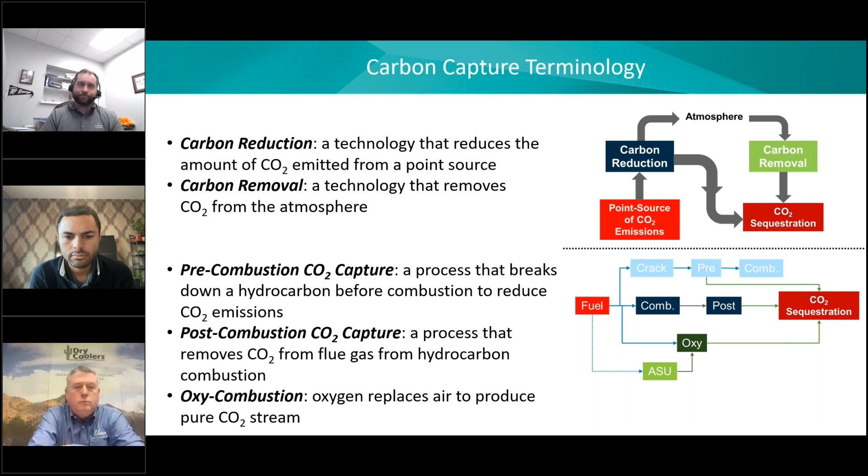So CO2 capture is really about separating the CO2 from the stream you're targeting, and that is the challenge - how do you do that most effectively? There are things that can impact how big of a challenge that is in different cases. If you have a lower concentration CO2 stream, the penalty for separating it, whether that's heat or energy input of some other sort, is going to be higher for the amount of CO2 you get out.

Because of that, you want to maximize efficiency of these processes to minimize the energy penalty, and you want to reduce the equipment size to minimize the capital cost. All of these things add up to whatever it is you're going to pay to do CO2 capture, so you want the least energy and the smallest equipment for the smallest cost. Different applications may dictate different separation technologies.

So the plant characteristics will determine integration. Some technologies use heat as part of the process, some don't. Depending on the availability of heat, that determines whether that process is a good fit.

And then the CO2 end use could impact the requirements as well. Some technologies have an easier time producing a very pure stream of CO2; others struggle to reach that same level of purity. So depending on what you're going to use the CO2 for, whether that's the beverage industry or sequestration, that could impact what technologies you can choose.

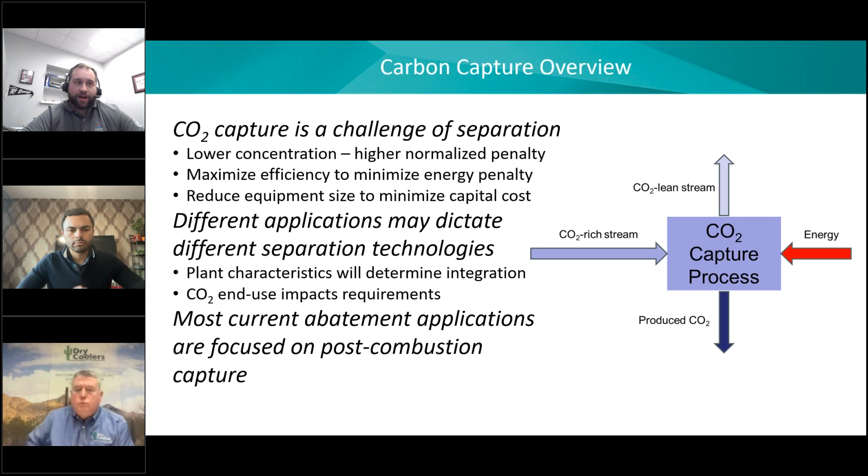As I mentioned, most current abatement applications are focused on post-combustion capture because we already have developed the processes we're using to make different things that help drive our world, and we don't necessarily want to reinvent those processes - we just want to decarbonize them. Right now, post-combustion capture is one of the more straightforward ways to do that.

So now digging into the technologies themselves, first we'll look at absorption, which is carbon capture by solvent. Solvents are liquids that can take CO2 into the bulk phase of the liquid. So if you pass a gas stream through that liquid, the CO2 will bind with the liquid and the rest of the gases can leave at that point.

Here's how that works: flue gas or a process gas enters typically the bottom of a big vertical column, and as the gas goes up, you have the solvent flowing down the column. As those come in contact, CO2 binds to molecules in the liquid, and you have what's called a rich solvent that leaves the bottom of that absorber. It's rich in CO2, and it goes over to a separate process unit called a regenerator or a stripper.

There, the CO2 is stripped out of the liquid by applying heat to it. So the liquid can absorb CO2 at low temperatures, but then it releases it at higher temperatures. After the heat is applied and the CO2 is driven back off, that solvent can then be recirculated back to the absorber in a big figure-8 loop, basically. So you're catching CO2 on one unit, releasing CO2 on the other. The benefits of these technologies are that you can really achieve very high capture rates, 95+% pretty easily.

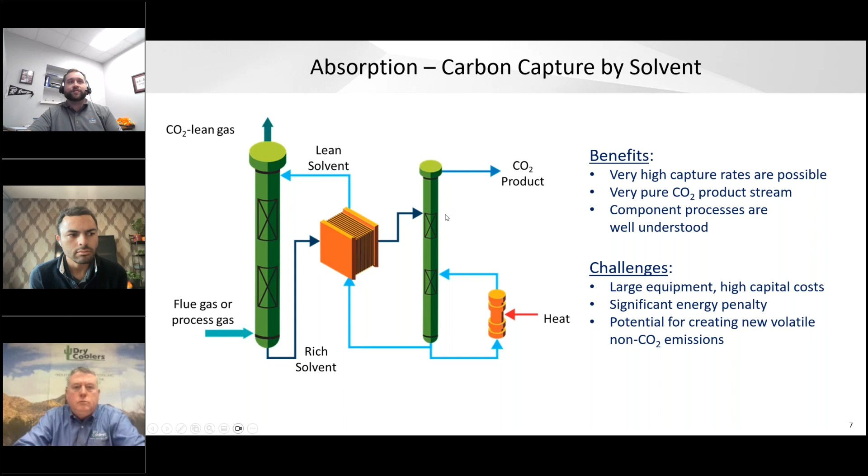For absorbers, the key is to maximize the amount of contact that the liquid and gas can have to really drive high capture. You want to minimize the pressure drop to prevent high O&M costs, and then you've got to control the solvent conditions to avoid those unintended emissions of volatile compounds.

The challenges to scale these up are that the bigger this equipment gets, the harder it is to maintain a uniform liquid distribution within the column, and it gets harder and harder to minimize unintended losses at that point. But that's what research is focused on, making sure we understand the mechanisms and how to avoid those as well.

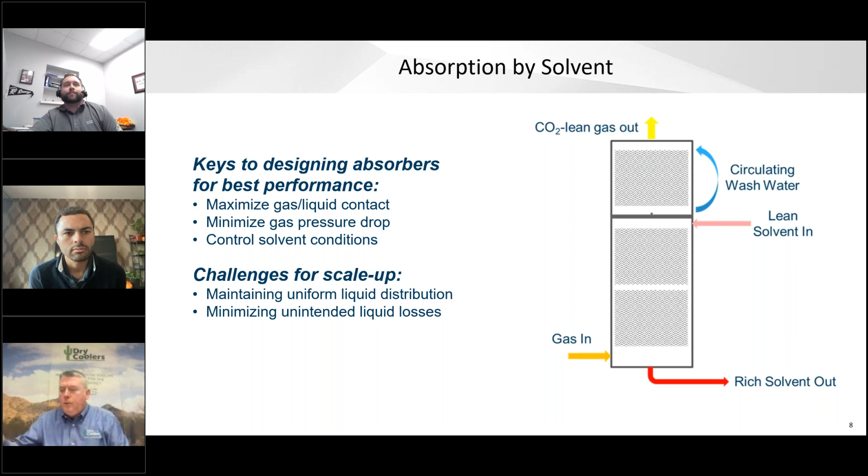On the regeneration side, really a big thing, especially as you look at new industries to apply carbon capture to, is how can you maximize heat integration and minimize heat losses? This is an energy intensive process and a thermal process at that. We want to take advantage of every bit of heat integration that we can within a plant, but eventually there's going to be a CapEx exceeding the OpEx benefits potentially at that point. So understanding the best ways to integrate that heat is important.

You also want to minimize the potential for any undesired chemical reactions. While you have to heat these solvents to drive off CO2, when you heat them up, they can break down as well and form degradation products, which could be hazardous to personnel exposure, or could just be an added cost from having to replace the solvent material. So understanding how to balance capital versus operating cost and maintain the conditions that will maximize efficiency are really important when you're looking at solvent-based absorption systems.

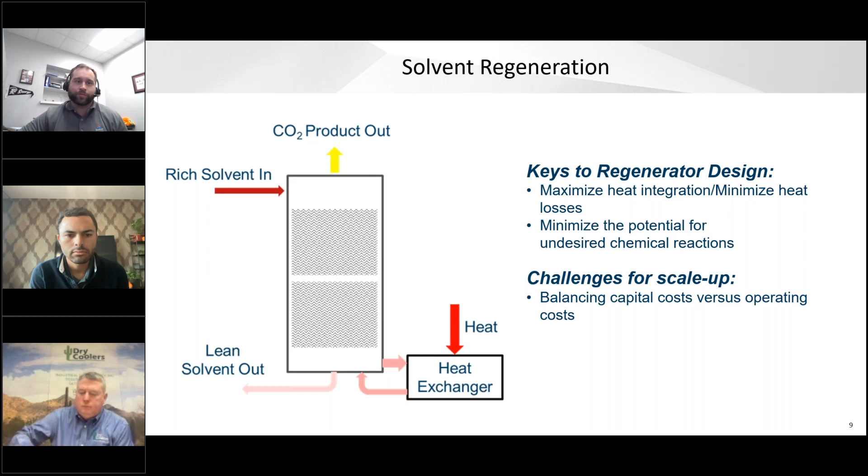Another set of technologies would be adsorption - so adsorption is carbon capture by solid. Instead of using a liquid, you have a solid where CO2 will bind with the surface of that material due to its physical properties or even its chemical properties embedded in that surface. So you flow a gas stream across this adsorbent, and CO2 binds to the material as it goes through the system, and then everything that's not CO2 can leave on the other side.

At some point you have to flip that around, and heat it again to drive the CO2 product out, or you can also swing the pressure or some combination thereof. The benefits of using a solid instead of a liquid is you can eliminate water from the mixture, and decrease the energy penalty of driving that CO2 back off because you're not having to heat water. You can also produce a very pure CO2 product stream with much less potential for volatile emissions because you don't have a liquid that can be evaporated as easily.

Just like solvents, we use sorbents for other purposes in industry already, so we understand the component processes really well. Challenges for this remain that this is large equipment with high capital costs, and you've got to have a material that's durable and reliable. If you have a liquid system and your material starts to break down, you can kind of have a bleed and fill system where you're making up solvent really easily.

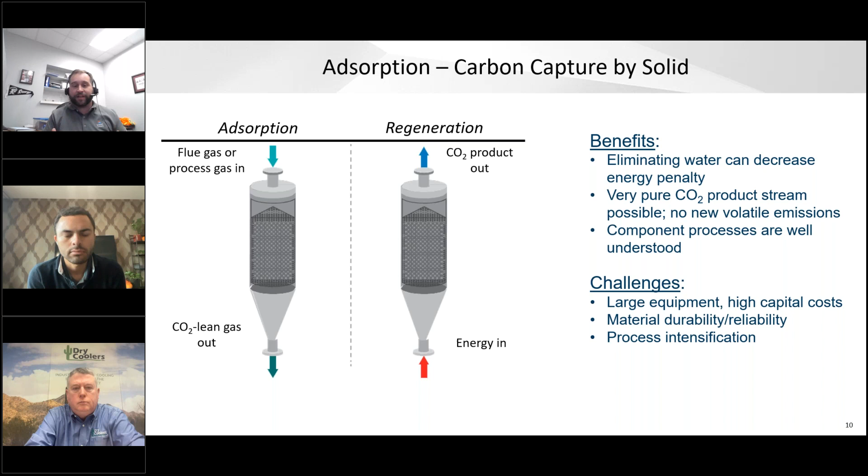If you have a solid that's packed into some vessel, that's going to be pretty labor intensive to go and change out that material. So you want to avoid that both from a capital and a labor cost perspective. And then how do I make this process intensified enough to minimize any downtime when the equipment's not either adsorbing or regenerating CO2? Because if it's just sitting there, it's just a cost that we're carrying.

So optimizing it, you want to maximize the contact area between the solid and the gas stream while minimizing pressure drop, because pressure drop means cost. And then you've got to have effective heat transfer to make sure you actually maintain the capacity of the material over time.

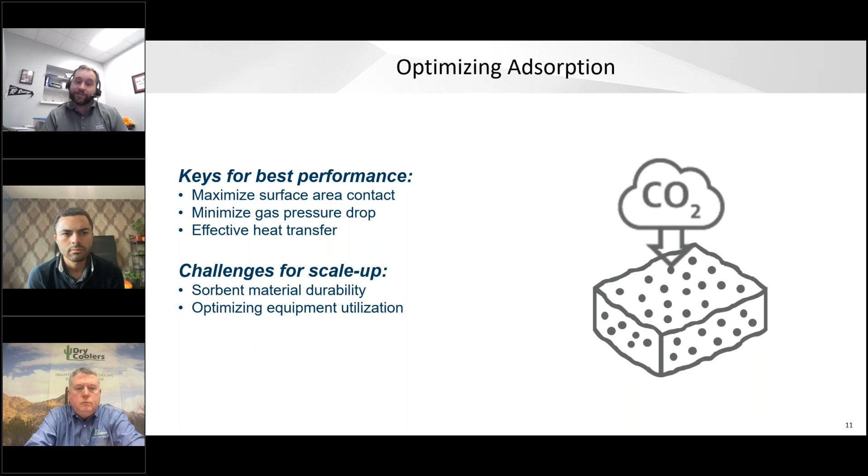Scaling them up is challenging because you've got to make sure the materials are durable. They're going to last long enough to make this process worthwhile. And again, you've got to make sure the equipment is running, not just sitting and carrying costs.

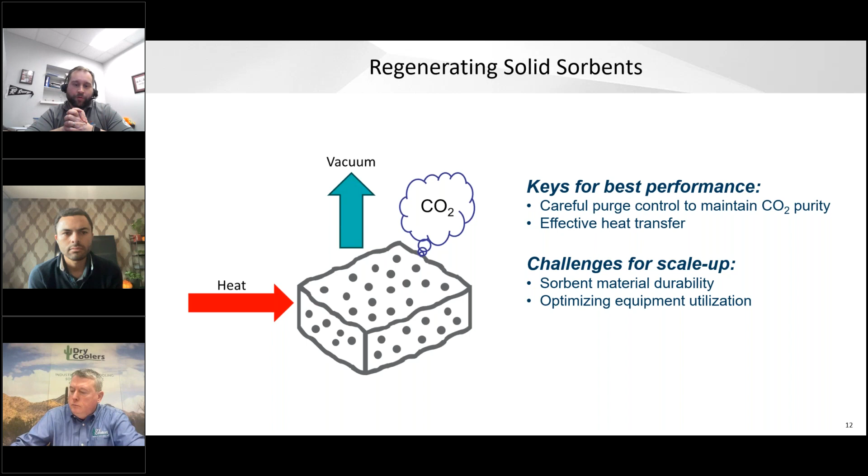On the regeneration side, you've got to have really careful purge control typically on sorbent systems to maintain CO2 purity, because you want to be able to put it in a pipeline or sell it into the market. And you've got to have effective heat transfer so you're not wasting heat as you're regenerating the CO2. We want as much heat as possible going into CO2 production and not into heat losses. The challenges are really the same for both the adsorption and the regeneration side.

A third technology type would be membranes. This is carbon capture across a barrier. You may be familiar with membranes from other separation techniques, typically water purification would be a good example—reverse osmosis is something people think about. But this is going to be a semi-permeable material that will let CO2 cross the material, but will not let other things in a gas stream cross it.

So the gas is typically compressed, and then it goes into the membrane. CO2 crosses the material and comes out as a product, and everything that's not CO2 exits the other end as the emission gas.

Benefits for membranes: this is not something that requires heat. So if you had a facility where heat was challenged, you could use this instead—it's an electrification of carbon capture. It's typically smaller equipment with lower upfront capital costs because you're compressing that gas stream, so the separation can occur in a smaller area. And you don't have a potential for new emissions because you didn't introduce anything new to the stream.

The challenges for membranes are really about material durability and reliability. If that material breaks down and starts letting things through that aren't CO2, then you don't have the product you're looking for. Or if the material plugs up, like any kind of filter can—think about even a simple example like the air filter in your HVAC system at home—you're going to end up having less throughput, and that can also be a problem.

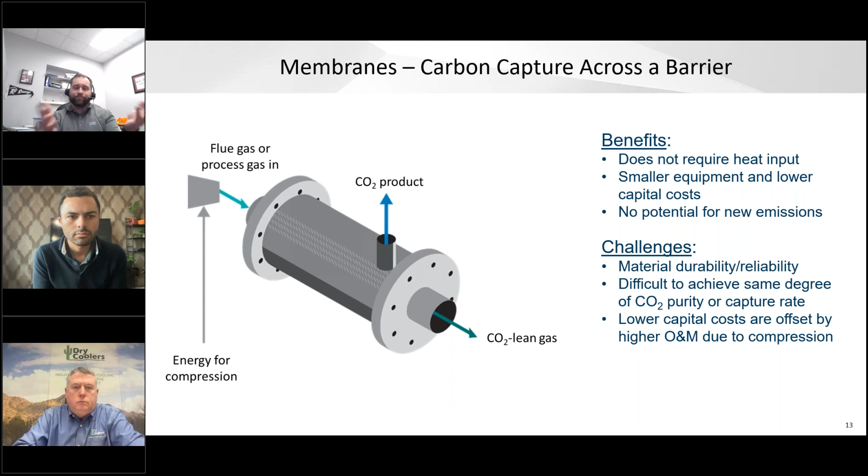It's difficult to achieve the same CO2 purity and capture rate that you can with solvents and sorbents, and I'll explain a little bit why on the next slide. And the lower capital costs are going to be offset by higher O&M due to compression. So it's a little bit of, do you want to pay in capital or do you want to pay in O&M? Either way, you're really going to end up paying the piper.

Membrane materials work by basically a differential concentration across the material. You can look at it in this illustration: the more CO2 there is in a stream, the more of it can cross a membrane barrier. And as you have less and less CO2 in your stream, you're going to have less and less flux across that membrane material. There's a couple of terms that describe this relationship of things crossing a membrane: permeance and selectivity. Permeance describes how much CO2 can cross the barrier, the rate of transfer across the material. Selectivity means how much CO2 versus, say, nitrogen in this case will cross the barrier.

The unfortunate thing is you have an inverse relationship typically between permeance and selectivity. So the more CO2 you can let through at a higher rate, the more of other things you're going to end up letting through as well. Whereas if you want very pure CO2 crossing it, you're going to have a much lower flux across the material. So optimizing those is really important.

We also have to minimize pressure drop. I said that we're having to do compression on these typically, and that's cost, that's energy you have to put in to do compression. There typically are things you can do to a process to make it more membrane amenable. If you can adjust the process to maximize the inlet CO2 concentration, that will create better performance in the membrane material.

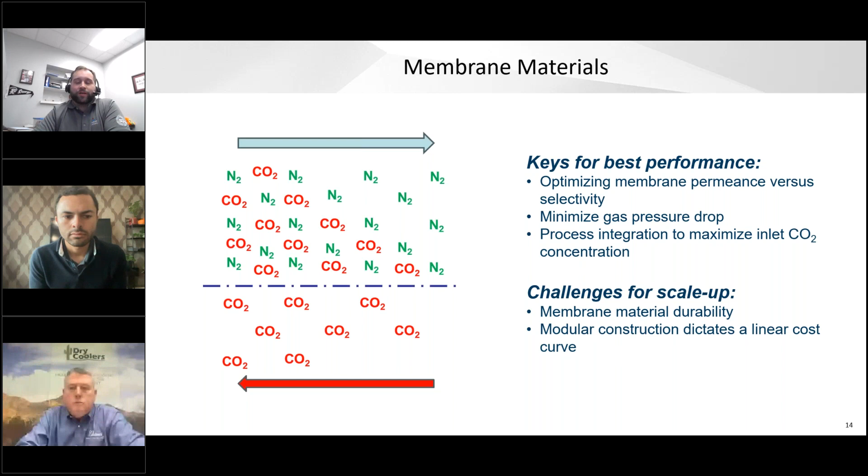The final technology type I'll talk about are cryogenics. This is carbon capture by phase change. CO2 is interesting in that it can change directly from a gas to a solid, and that's typically what cryogenic technologies are doing. They are pressurizing and cooling a gas stream to the point where CO2 becomes a solid, like dry ice. That's what solid CO2 is. You put it through its paces of cooling, compression, and then some type of separation, and you can produce a CO2 product and a lean gas based on just the thermodynamic differences between the technologies.

The benefits of this: because you're compressing the gas stream, the equipment's typically going to be smaller and less expensive. Because you're not adding anything to the stream, you don't have a potential for new emissions. And you can have a very pure CO2 product that can be collected as a liquid. You can create the solid and then melt that into the liquid phase for transport, which has some benefits.

The challenge is this may be difficult at large scales and large flow rates of CO2 because, frankly, you can only build compressors and heat exchangers so big, so there's going to be kind of a limit there. And your lower capital costs are, again, offset by higher O&M because not only are you doing compression, you're really doing some type of refrigeration at that point as well.

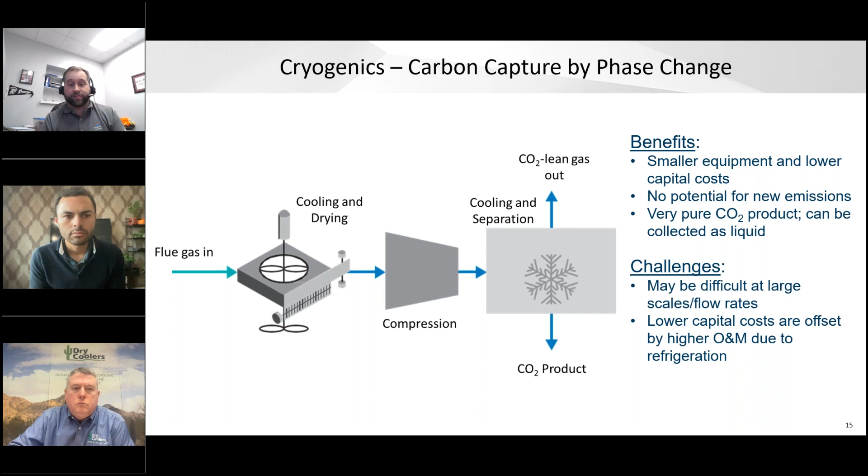So the interesting characteristics of CO2 is what makes this possible. The triple point of CO2, meaning the point where if you change the temperature or pressure just slightly, it can go from gas to liquid, gas to solid, solid to liquid, or solid to gas, is actually at reasonably achievable conditions. CO2 will change phase much before, say, oxygen or nitrogen will. So you can put it into the solid phase while leaving everything else in the gas phase, and solid-gas separations are really effective and pretty straightforward.

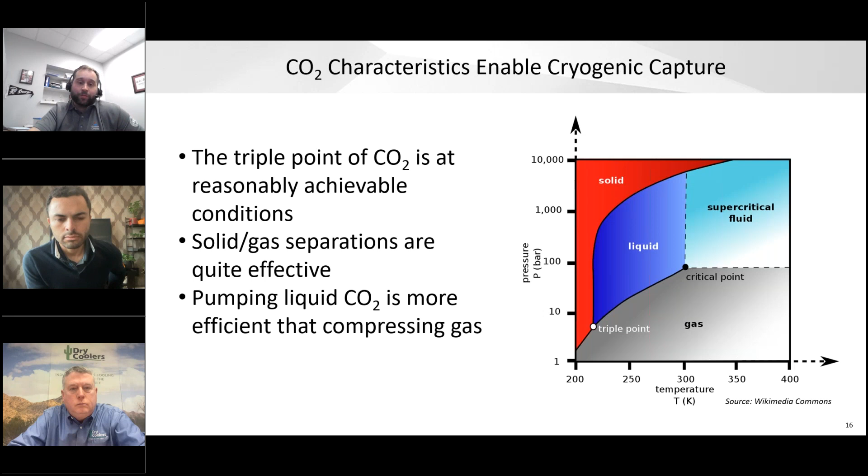And then pumping liquid CO2 — if you froze it into the solid phase and then melted it into the liquid phase, pumping liquid CO2 is actually much more efficient than compressing CO2 as a gas. CO2 that is going to be stored or sequestered underground needs to be in this supercritical fluid region, so it's more effective to pump it as a liquid up into the supercritical region versus compressing it as a gas — it's going to be less of an energy penalty. So even though we used a lot of energy to cool and pressurize that CO2, we save some energy on the back end.

So just to summarize the state of technologies, none of these have an inherent thermodynamic advantage over the other. Really, it all comes down to being pretty close to equal, all things considered. But they all have strengths and weaknesses, and so the specific application is going to help determine the right technology fit.

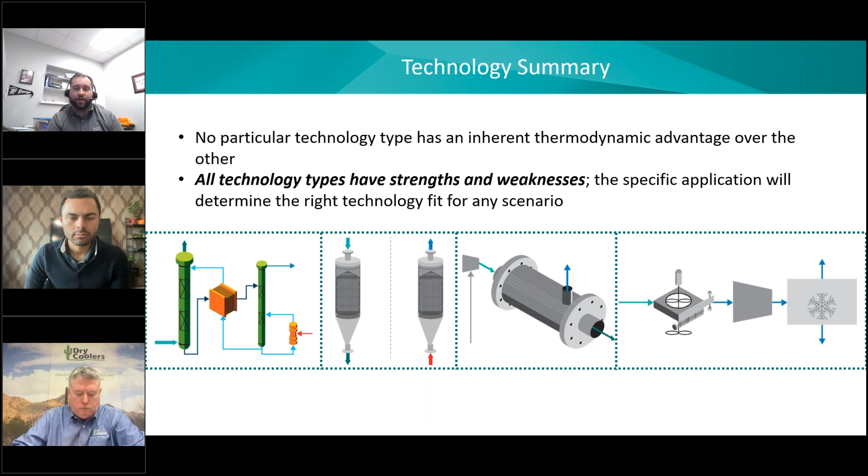And they're going to be higher O&M, lower capital. So depending on your situation, a different technology may make more sense than another in that scenario. But there's none that is a silver bullet solution for every single emission standard.

And with that, I will take any questions.

We did have one question about what level of temperatures are needed for absorption and adsorption. On absorption on the front end, you typically want to operate in the lower 100s, maybe 110 F to 150 for absorption. Then in regeneration, you have to drive those temperatures up to maybe 240 to 270 F for most solvents. There are a few that can operate at higher temperatures than that, but that's kind of the difference you're looking at there. Basically an elevated ambient on the absorption side, and then a low pressure steam temperature on the regeneration side.

Adsorption is going to be similar in most cases. The temperatures can vary a little bit more because some people also use pressure swing, where they basically pull a vacuum on the adsorbent material, and that helps drive off CO2 as well. So then they don't go to as high of temperatures.

We also had a question that I think Christian's going to answer about what are we going to do with all the captured CO2. I'll give a quick note on that. Most of it's going to have to be stored somewhere, whether that's through enhanced oil recovery or just sequestration. But there are some utilization opportunities that are developing as well. I'm looking to feed my soda stream off my water heater, not having to buy a little compressed CO2 bottle. So hey, maybe that's the house of the future at that point.

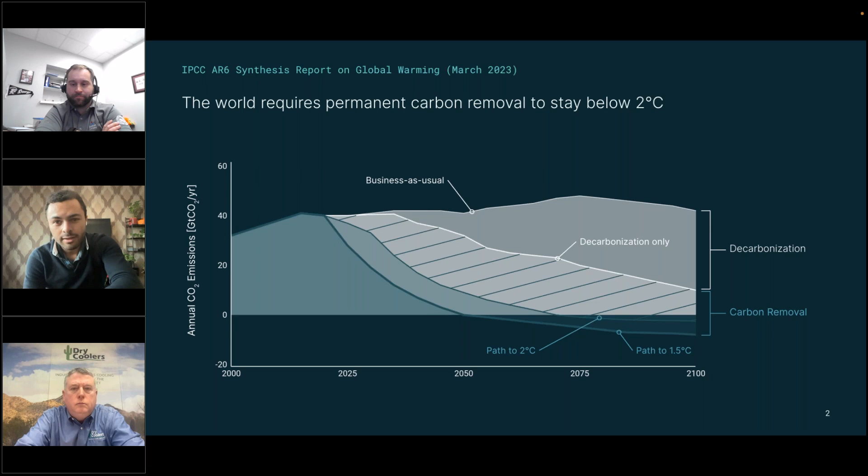So here you're looking at kind of all the different decisions that companies and countries need to make on their way to reducing their carbon intensity to net zero. As you can see here, carbon removal is what puts the net in net zero, because this is a complex economy. It's not as simple as just flipping a switch and decarbonizing everything and moving forward from there.

We have to not only—sorry, that's my wife.

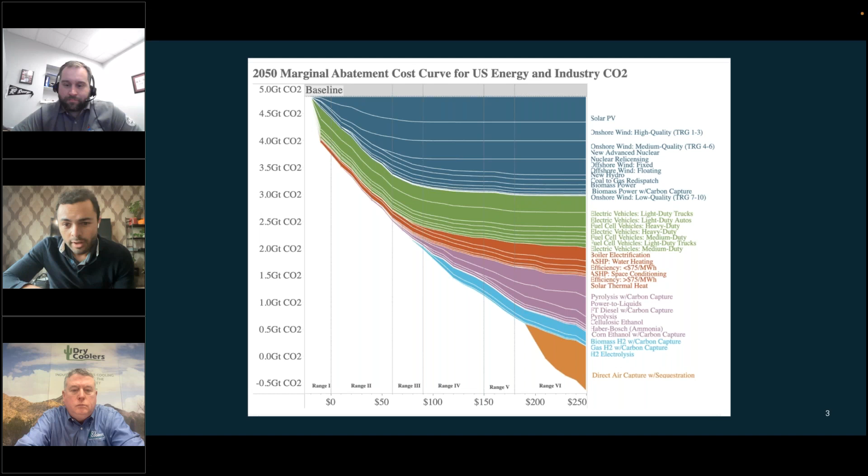Then you get into the slightly more expensive realm of electric vehicles, boiler electrification—these are going to cost a little more. Then you get into the carbon capture space. And then you get into a segment of the economy where there's just no affordable or feasible ways to get the actual carbon intensity to zero. These are the hard-to-abate emissions, the difficult-to-decarbonize sectors, and they're essential to the economy and they're not going anywhere.

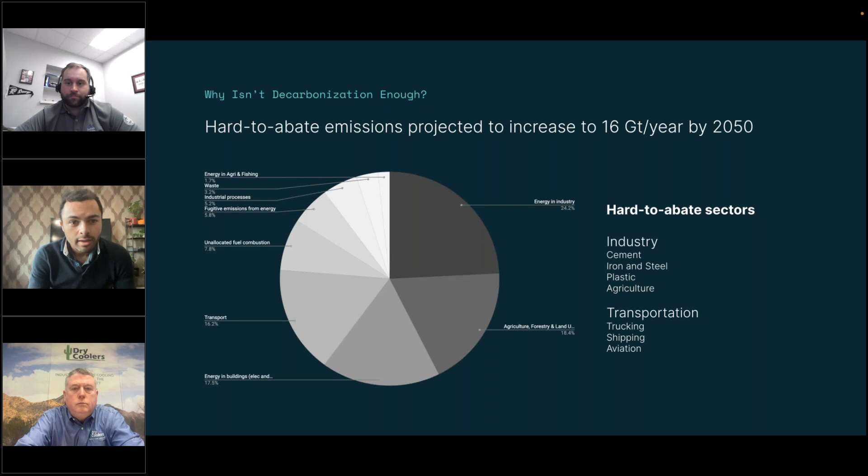By 2050, we're expected to have these emissions—which we'll call residual emissions—at about 16 gigatons a year. These are industries like cement, iron and steel, plastic, agriculture, trucking, aviation. What a lot of these industries have in common is that they're some of the only few commodities we produce at multi-billion ton scale, and unfortunately, they're also some of the most difficult to bring down on the decarbonization pathways.

Hence the need for direct air capture. When you're able to actually pull that carbon dioxide out of the atmosphere, you can account for residual emissions in some of the most difficult-to-decarbonize sectors of the economy that are still going to be emitting by mid-century, by 2050.

Direct air capture is one such option for removing carbon dioxide from the atmosphere. It's become a popular pathway. You've seen a rush of capital and interest from buyers and project financiers into DAC because it's got very clear measurability and verifiability. So you can point to exactly the amount of CO2 that you're capturing from the atmosphere and then going on to remove.

You can do that on a very small land footprint. You can do it in a very additional way. We've probably all read a bit about the controversy of these offset markets, where you're flying on a plane and planting a tree and saying that's accounting for your carbon emissions because you didn't cut the tree down. I think there's been a lot of justifiable controversy in those offset markets for that reason.

When you're pulling CO2 out of the atmosphere, there's no question as to whether or not that's an additional service, or whether you're actually accounting for that CO2, because it was going to be in the atmosphere until it was removed.

And you have other pathways for carbon removal, like carbon mineralization, where you're using a mineral that's naturally thirsty for carbon dioxide, spreading it out maybe on a farm, et cetera, and letting it absorb CO2 from the atmosphere in a very passive way—an interesting pathway as well. The capture materials tend to be very inexpensive, like lime or basalt, but you're using a lot of land to do that, and it's unclear how much CO2 you're capturing.

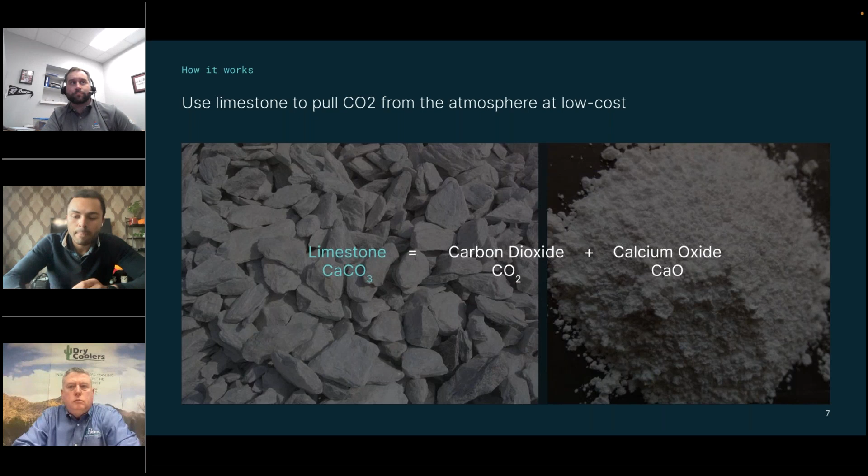The problem is that would take years. These natural processes work very well at absorbing carbon, but they take a very long time, and we need to move that onto a human time scale if we're going to get serious about removing carbon dioxide from the atmosphere at scale. So Heirloom's process is we start with limestone and put it into an electric kiln.

This kiln is electric and it's also designed to capture all of the CO2 that comes out of the reaction. We put the limestone into the kiln, heat it up, separate a pure stream of CO2 from calcium oxide, and take that calcium oxide and put it on these trays, like a baking sheet you'd bake cookies on. We stack them in these very tall towers and expose them to the ambient air.

We treat that lime in such a way that it absorbs CO2 from the air and reforms this limestone in just 3 days. We take that limestone, loop it back to the beginning of the process, put it back into the kiln, heat it up, separate the lime, and loop limestone over and over again to remove CO2 from the atmosphere at scale.

That's Heirloom's process. There are a lot of different direct air capture companies doing this in different ways. The sorbents that John spoke about in his presentation are also being used in the direct air capture space, where you're taking a big vacuum, cycling in air, and bonding it to the sorbent to capture the carbon dioxide, then heating it and taking the carbon dioxide and storing it.

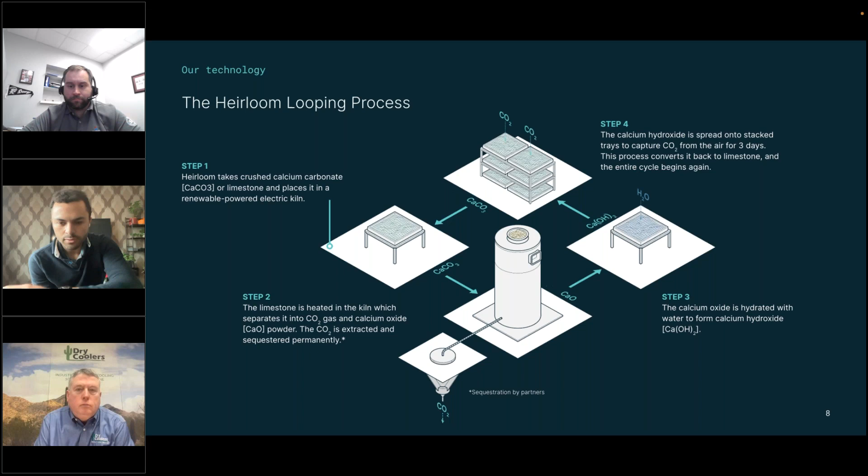But that leads me to the next part of this discussion, which is, where do you put this CO2 once you've captured it from the atmosphere? I'll start with what Heirloom's doing now: in February of last year, we pioneered the storage of atmospheric CO2 into concrete. You take the CO2 you captured from the atmosphere and inject it into the reclaimed water that's used to make concrete.

The benefit of that being that it mineralizes. So it goes from being a supercritical fluid to a mineral and forms as a part of concrete. The benefit being it's a durable store for CO2 that, for our purposes and for the buyers purchasing our credits, keeps that CO2 out of the atmosphere. Even if you blew up a building made out of that concrete, that CO2 is a mineral - it's going to stay embedded amid the rubble for centuries.

We're using concrete now because it's a durable store and it's immediately available, a very interesting repository for carbon moving forward. And there's going to still be a lot of concrete around for the rest of this century. By 2060, we'll be building a new New York City every day.

But even if you were to store all of the carbon dioxide we'll need to be removing by 2050 into concrete, you'd only account for about 5% of that chart I showed you earlier in the presentation. Because by mid-century, we're going to need to remove 5 to 16 gigatons of carbon dioxide from the atmosphere every year. The sheer volume of that is just very hard for even myself to get my head around.

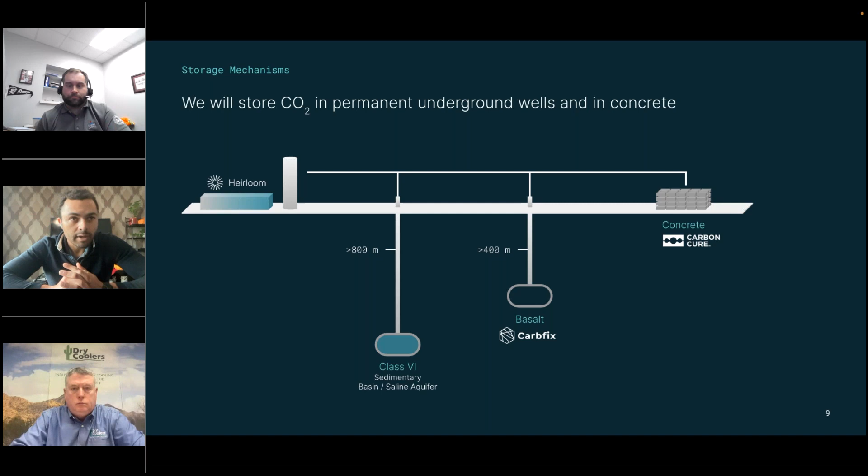The benefit also of direct air capture with regards to storing it in these Class 6 wells is that you can locate as near to the wellhead as humanly possible. You're limiting your need to transport the CO2, which can be quite unwieldy depending on where you're building in the United States. Deploying these CO2 pipelines from all these different sources of emissions to a wellhead is a complex operation. With DAC, you can co-locate and basically do the capturing of the CO2 from the ambient air right at the place you'd like to inject it.

To cover this a bit, I mentioned Heirloom's building in Louisiana. So Uncle Sam is playing the role of angel investor a bit with the direct air capture space in the United States, because they want to see the U.S. kind of take the lead on the jobs that come out of this industry moving forward.

The Department of Energy, through the bipartisan infrastructure law, has provided matched funding for these direct air capture hubs across the states. Heirloom was lucky enough to be notified of selection to build a megaton facility, a 1 million ton capture capacity, removal capacity facility in Southwest Louisiana. That accesses up to $600 million in matched funding.

I can't say that hand over heart we've got that $600 million. We're still in the negotiation phase with the DOE. Moving forward on that, there's another hub being built in Texas.

Again, these aren't quite first of their kind facilities. There are commercial facilities - Heirloom's operating a commercial facility in the United States at the moment - but these are going to be the first and largest megaton facilities for direct air capture in the world. Still, a megaton facility, 1 million ton annual capture capacity, is a drop in the bucket relative to where we need to be within the next few decades, but a very important start for showing how these commercial facilities work at very large scale.

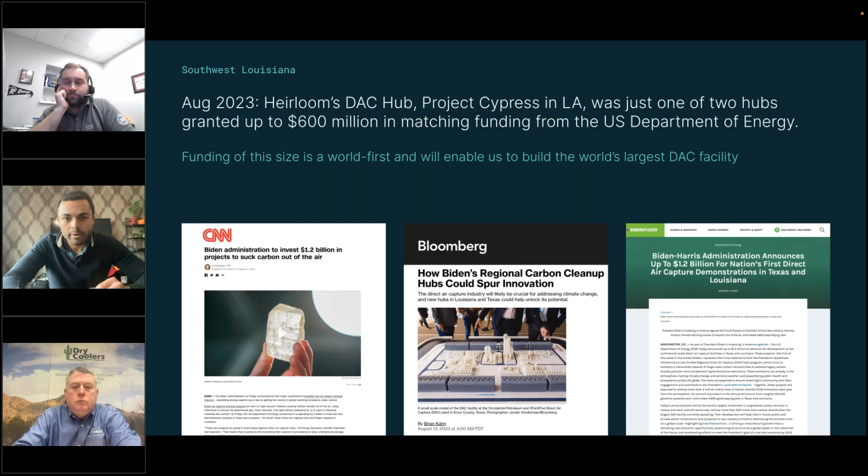I want to talk a bit about the buyer ecosystem, why there's a business case for direct air capture, and how this purchasing and procurement of these credits work.

In the direct air capture space, your business model is that you're selling a credit that constitutes a net ton of carbon dioxide that's been removed from the atmosphere. That's a net ton, so you're considering all of the embodied emissions associated with actually building the facilities themselves, transporting the CO2, and powering the facilities to run. Once you've accounted for all those emissions and removed them, you can sell a net ton of carbon dioxide - a truly additional ton of carbon removed from the atmosphere. These purchase agreements are generally very long term.

We signed an agreement with Microsoft in September of last year to remove 315,000 metric tons of carbon dioxide from the atmosphere over a 10+ year period. The facilities that will service that purchase haven't been built yet. This is a model that accelerated deployment of renewables, where you're locking in prices and volumes over the long term, so that the supplier, Heirloom in this case, can go build the facilities that produce the credits for this buyer. When you do that, you de-risk the demand side and can attract a lower cost of capital to actually get these facilities built.

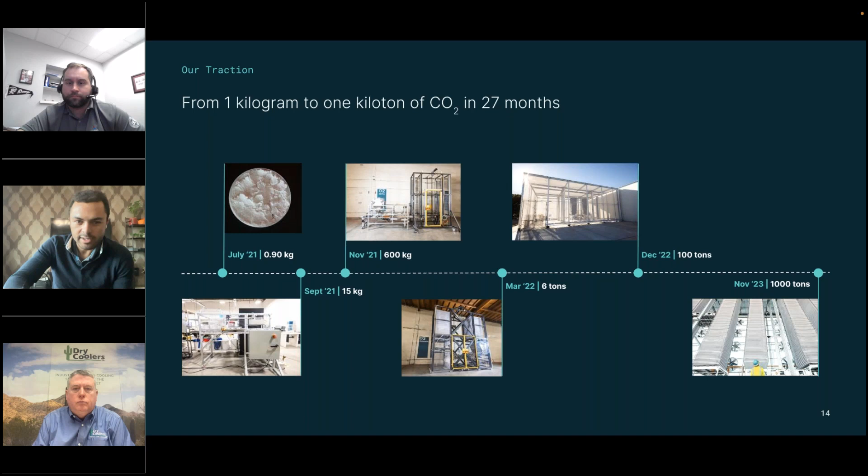Thank you, Christian, very interesting presentation. I was thinking, as a consumer of electricity in the Detroit area, I could pay for green power, and I wonder if there's a market for people. I think of our favorite Taylor Swift, who pays for carbon credits for her private plane. Go get her as your spokesperson and you could offset all her carbon use - there's a marketing idea for you.

Yeah, actually there's a lot of interest in that. She's offsetting her flights right now with kind of the traditional offsets, which, as I mentioned, have some controversy in those markets around whether or not those are actually accounting for the carbon associated with what they're offsetting.

But yeah, aviation is obviously one of those very difficult to decarbonize sectors, regardless of the Swifties and their interests. You're going to see some evolution in SAF, sustainable aviation fuel, that can reduce the carbon intensity of that sector a bit. But generally, we're most likely going to be flying more in 2050 than we are today, so there's going to be more emissions associated with air travel, and SAF can only get you so far down the emissions curve. So DAC is going to play a role there as well, for sure.

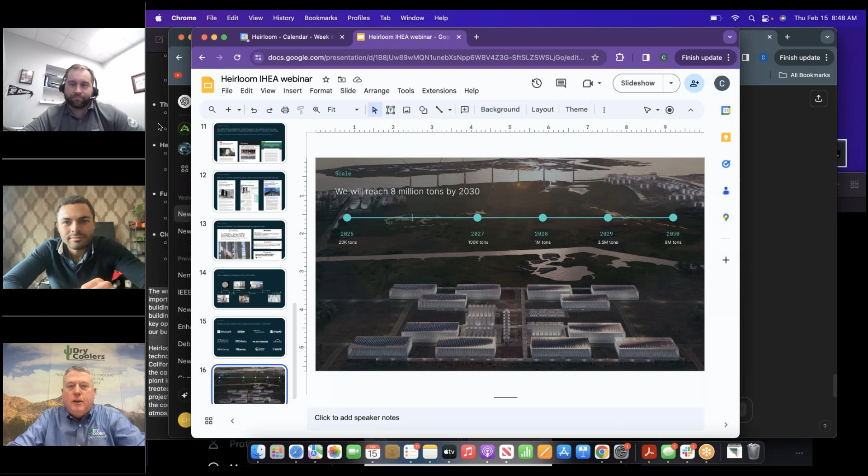I invite people to type in questions — the gentleman asked at the first presentation, what are we going to do with this carbon? And I think that was answered: we're going to put it underground.

I've taken my screen off, right? Yeah. Yes, no, it's good information. It's like you said, there's no silver bullet here — there's going to be a lot of solutions, a lot of partial solutions. That's what I'm seeing.

Yeah, you're going to have both, and making sure you apply them in the right places is really important. Aviation, I think, is maybe the single hardest emission to abate, because despite what you might have seen about electric planes or hydrogen planes, those are pretty far away. The energy density of a liquid fuel is really hard to match, so we're probably going to be reliant on jet fuel for a very long time. DAC is going to play a role there in the long term for sure, accounting for aviation emissions.